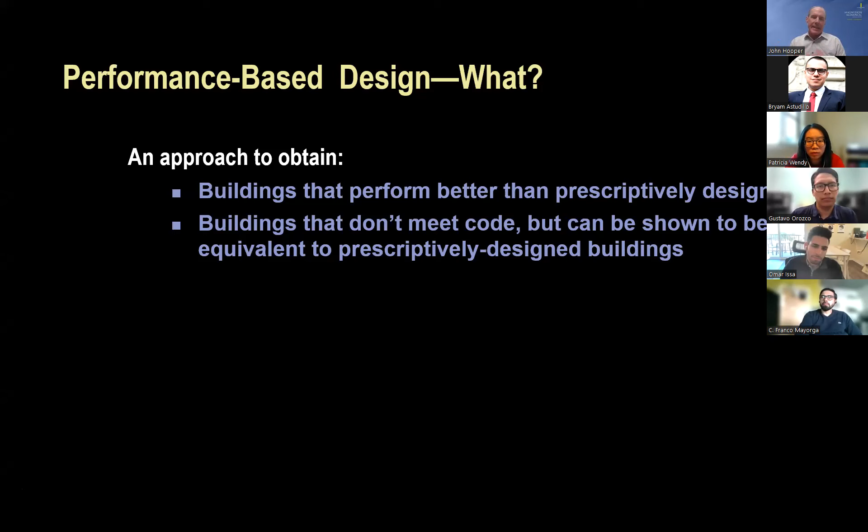So what is performance-based design? It's simply an approach to do one of two things: one being to get a building that performs better than what the building code requires, to improve its performance and make it more resilient. But what we've found in practice is the second case: performance-based design is typically used for buildings that don't meet the code regulations in one way or another. Using performance-based design, you can show equivalent performance to that of a prescriptively designed building, so it meets the code, but you don't follow all the code rules. There have been hundreds and hundreds of these buildings designed in the last 20 years, largely because of that second reason — we want to do something outside the code and prove that it works.

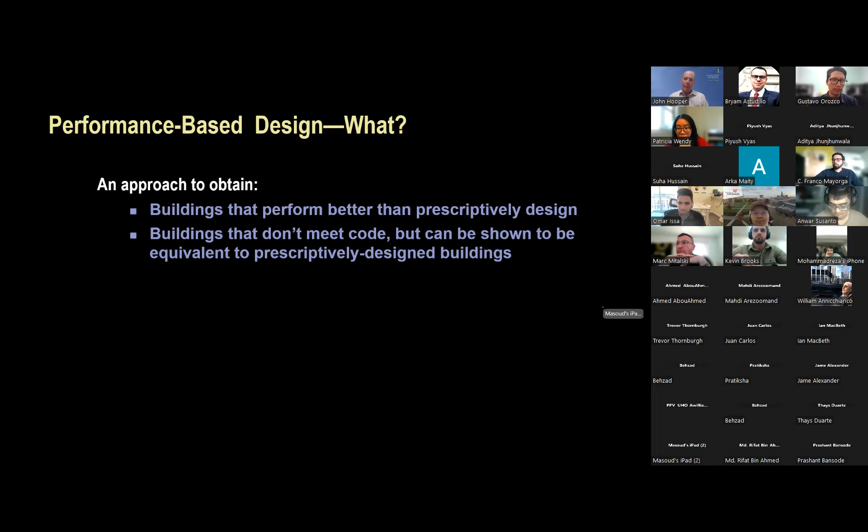Now I'm going to talk generically about performance-based design before I get into both seismic and wind. But without research and the work that you students do, and the students before you, we wouldn't be where we are today.

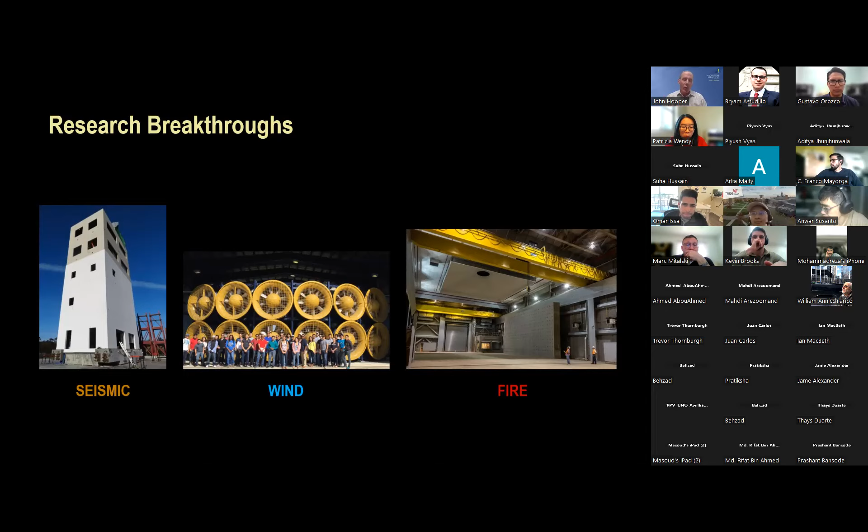And research breakthroughs — here are 3 different research items. The seismic one is the UC San Diego shake table. Without that, we can't really prove how well our designs work unless you can shake a full-size structure on a table. Then there's the wall of wind in the center, which allows us to study wind and its effects in a much more robust way than ever before, down in Florida. And finally, on the right, the NIST fire testing facility, which allows full-scale testing on assemblies of structures, floors, columns, and beams, letting us understand and prove out analytically what we do with real experiments, which is really important.

In addition to the research that happens at universities and NIST that we just saw, there are documents that have been developed with a lot of people involved in these various initiatives to put together best practices, so that we can kind of do it in a similar way. It's not a code, but it's a guideline.

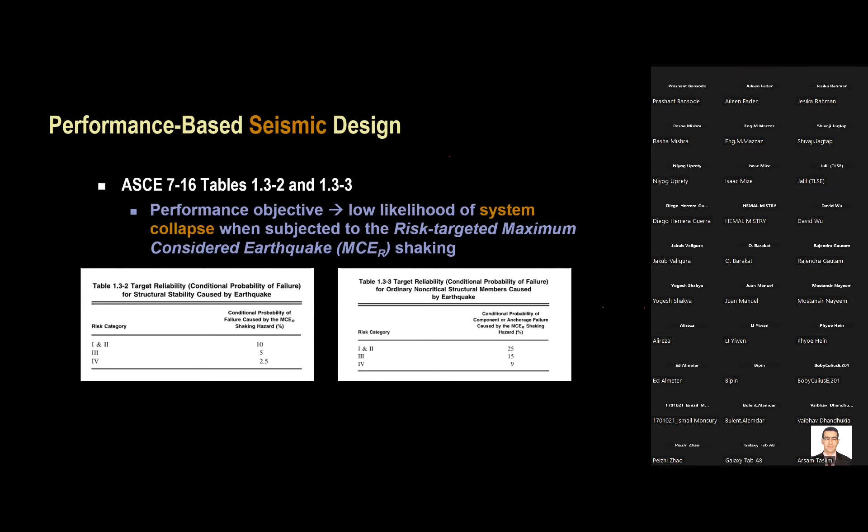What is low? The table on the left shows for risk category 1 and 2 buildings, ordinary buildings, ones we sit in pretty much every day, there's a 10% probability of collapse given MCE-sub-R shaking at the site. That's low. That's what we define as low. And as the buildings become more important, like risk category 4, which represent essential facilities, that number drops to 2.5%.

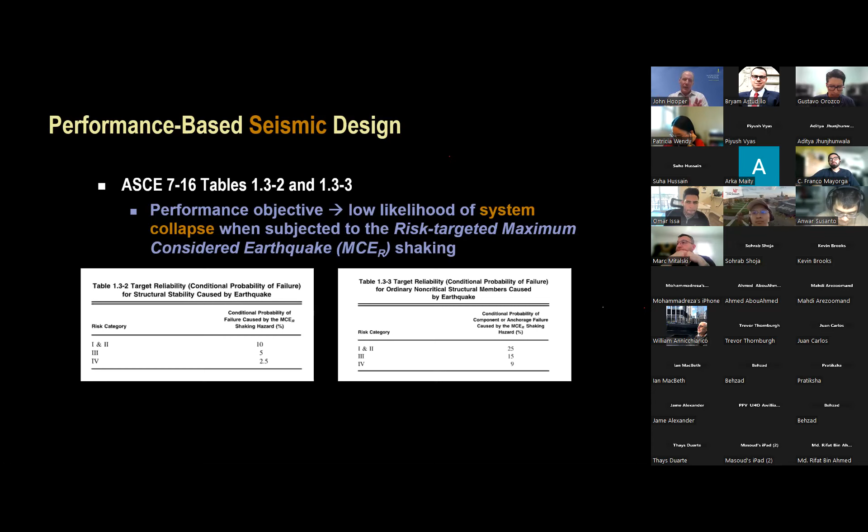And the table on the right is for a conditional probability of anchorage failure that could cause member failure in seismic. We don't really target that directly. We really target the overall system performance for seismic.

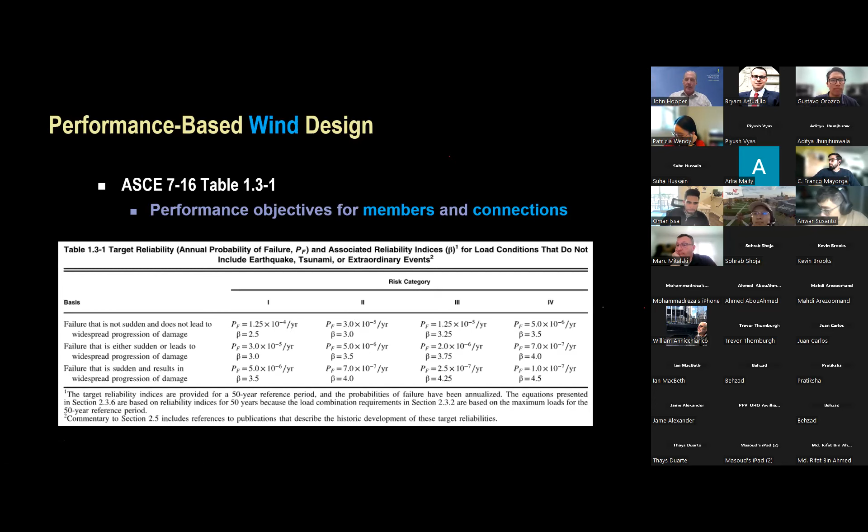But this is for member and connection, so wind does it differently. It's not a system-wide evaluation, it's a member and connection-based evaluation. At least for now, that's going to be changing down the road.

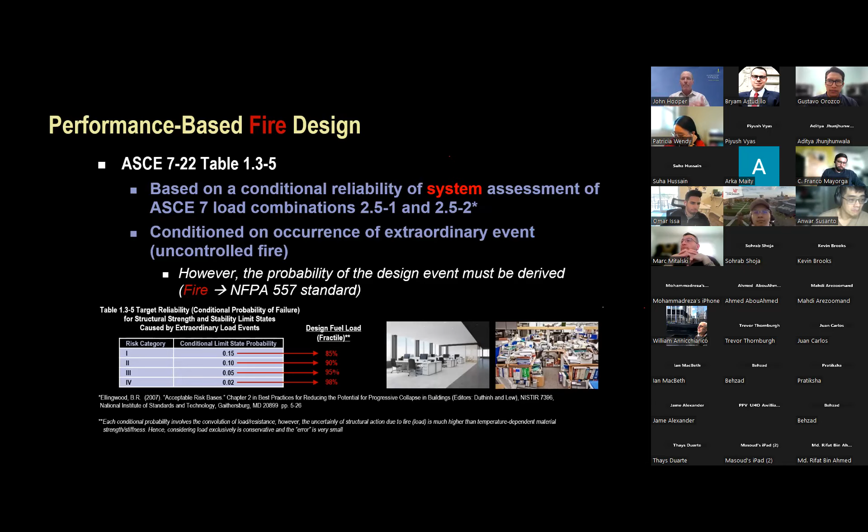In the lower right-hand side of this image is the important difference for fire. It's about the fuel load, how much fuel can burn, how long am I burning? You can see two extreme conditions: one is a bare office, and next to it is my desk. It's not quite that bad, but it could be. And the fire hazard and the fire fuel load is quite different.

And we look at conditional limit state probabilities, shown in the table on the lower left, about what kind of fractile that we're trying to design for and the low limit of probability of failure. So that's kind of an overview, high level, of seismic, wind, and fire.

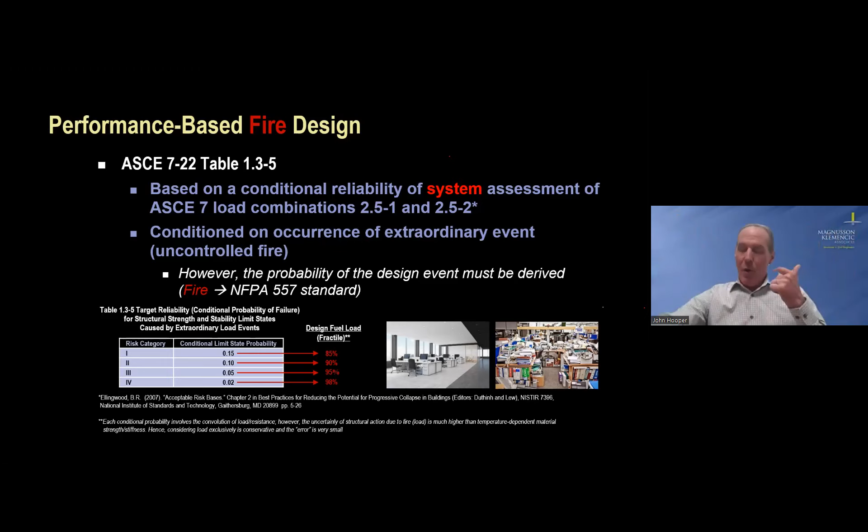Now I'm going to go back and go through in quite some detail on seismic, because that's the area that I work and live in every day. And we'll walk through this with you. The first one I have before me is the PBSD process. This could be for any performance-based process. It's very simple: you select your performance objective.

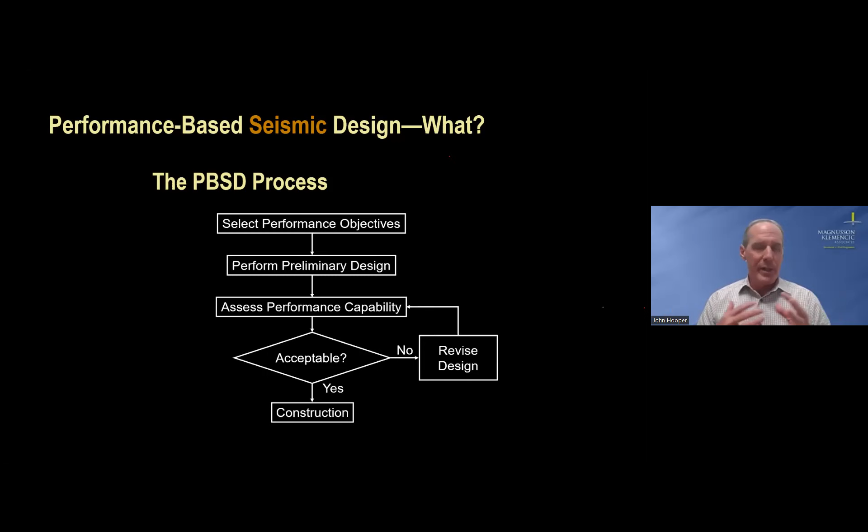What are you trying to achieve? You do a preliminary design to get something set up. You create a model and assess its performance. Do the members meet the performance criteria? Does the overall building meet the performance criteria for global response? If yes, that initial evaluation, then you're done. If not, you revise your design until you deem it acceptable. This is the most simple flow chart you'll ever see, but it's truly the backbone or framework for

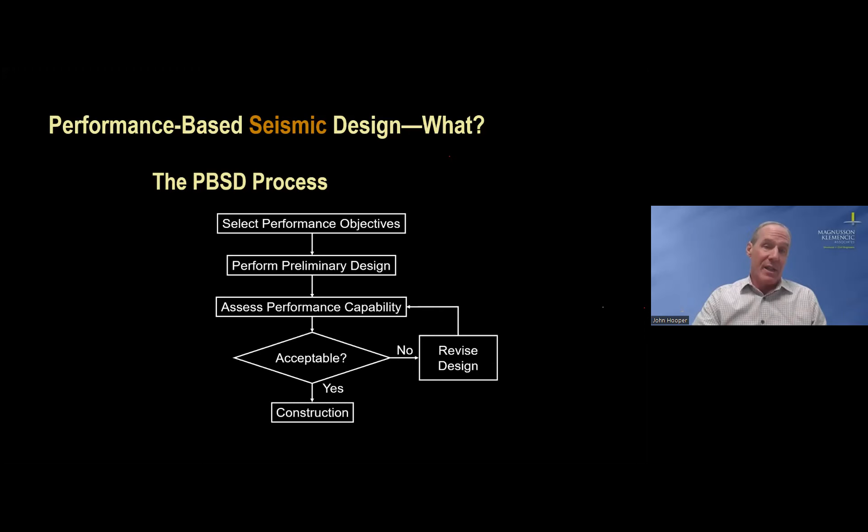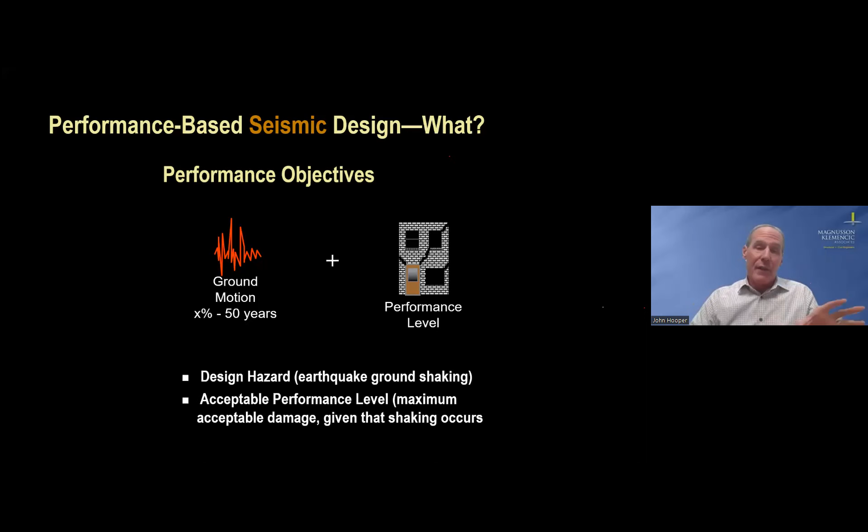what we do in PBD, both seismic, wind, and fire. What are performance objectives? It's very simple: a combination of an earthquake ground motion, usually termed in percentage of exceedance in 50 years. Typically our number is 2% in 50-year ground motions, although there's a lot more detail to that I won't get into. And you assign to that a performance level. Different levels of ground motion have different levels of performance.

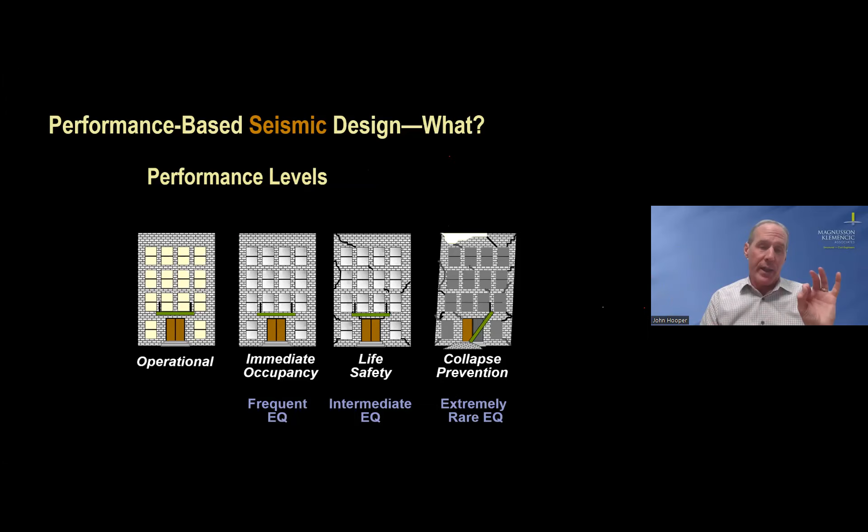But if a frequent earthquake happens, what we want all buildings to perform like is they have immediate occupancy capability, meaning you can stay in the building, you're sweeping up some tiles, you're putting books on the bookshelves, things like that. But you're ready to go in the building shortly thereafter the event. That's a frequent earthquake, maybe a 50-year return period, kind of that range.

The next one, life safety, is called the intermediate earthquake. That's really our design earthquake. You can see by the cracks in the masonry there, we expect structural damage because that is the structural fuse that dissipates the energy from the shaking the building feels. The lights are off because the power may have gone off, etc. The intent here is that everyone gets out fine. There might be minor injuries or so, but the building has a margin against collapse, a pretty healthy margin. The next performance level we describe as collapse prevention.

This is right before the building wants to collapse and pancake or sidesway collapse. This is the kind of performance we try to target not happening, witnessed using a very extreme rare earthquake, the maximum considered earthquake. That's the kind of performance we are trying to guard against, right? Collapse, so that we don't want to kill people. You might get injured, but we want to minimize a whole building coming down.

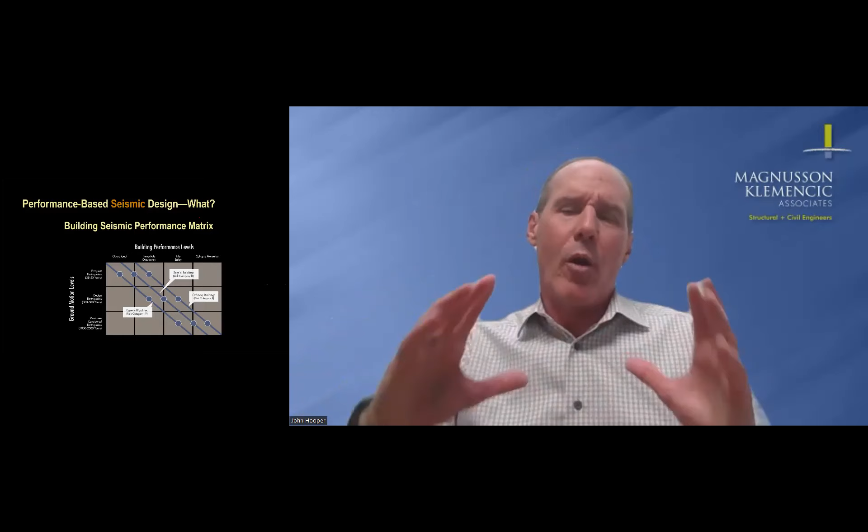Here is the same kind of information shown on a building performance matrix. There are three lines going diagonally across the matrix. The upper right one, for ordinary buildings, is risk category 2. If you concentrate on that line, there are three dots. The most important dot there is what we target: a 10% probability of collapse given MCE shaking. That's what we really are checking. The rest are inferred for risk category 2.

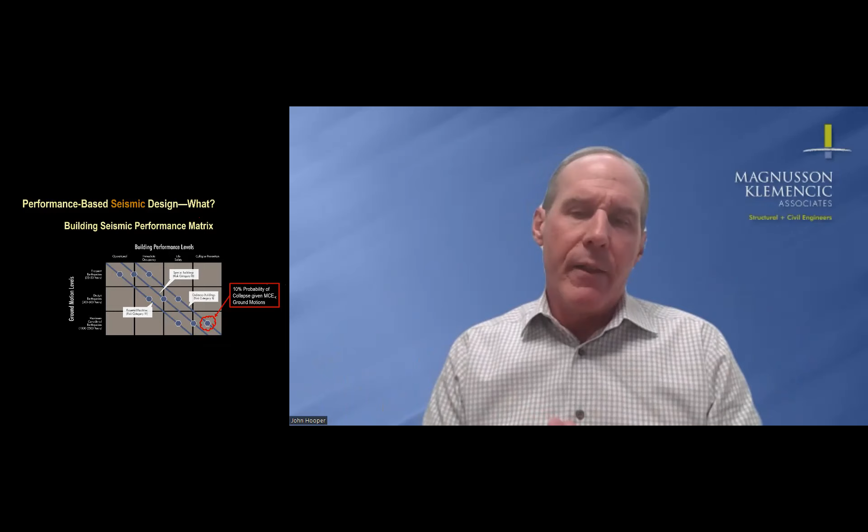For risk category 3 and risk category 4 buildings, these lines start to shift over at the bottom row, the maximum considered earthquake row—the performance level shows improved behavior, improved performance. You see that as this line goes up. So this kind of shows you in one quick matrix what the building code targets when we design for different risk category type structures, given different levels of ground motion you see here on the left of the matrix.

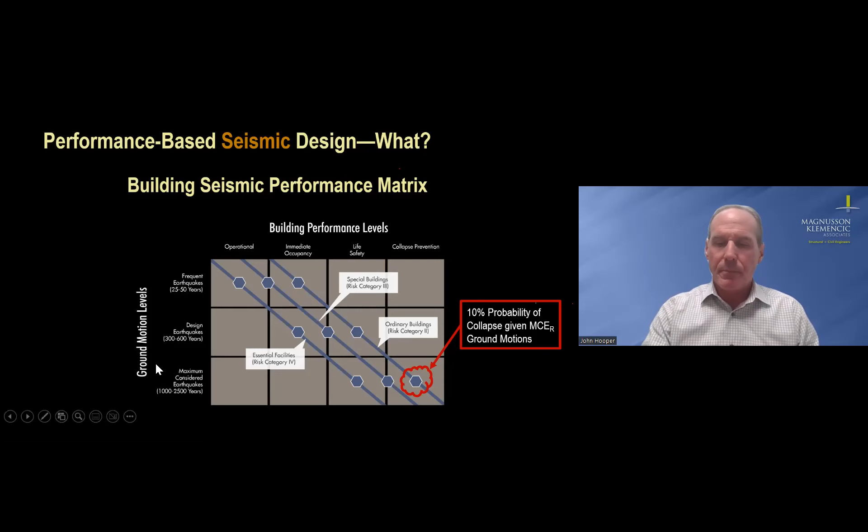We can look at the same information though, assuming a pushover curve. I assume most of us here on the call have thought about and been required to calculate a pushover curve, where you basically say, I have a building, I'm going to keep pushing it laterally, displacing it to the right, and assessing how it's performing as I push it.

Thinking about that as an intensity of earthquake shaking, as I go up this curve, I'm still remaining elastic. Therefore I have operational performance, like we're all sitting in our buildings or office or homes with everything going just fine. We're in the elastic regime, nothing's happening, all is good. You keep pushing, and all of a sudden you get a little bit of damage, a little bit of non-structural damage, etc. You have a tiny bit of non-linear response. There's a slight softening of your structure.

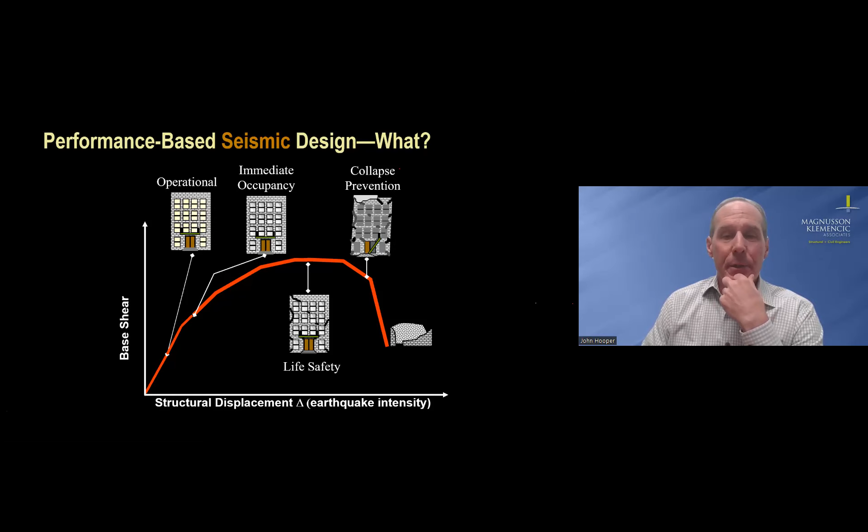And so as the deformation increases and the demand from the earthquake increases, you start to see a little bit of yielding. You keep pushing the curve, push, and get all the way over to a life-safe performance level. Again, this would be at the design earthquake, so you're increasing the deformation and the shear force in the building quite a bit, but you kind of peaked, right?

You have the flat portion of the pushover curve and life safety, that's your design earthquake type of situation. But there's a margin, that's the key here, a margin against the next performance target, which is collapse prevention. So you have a margin so that, again, minimizing the chance that lives will be lost.

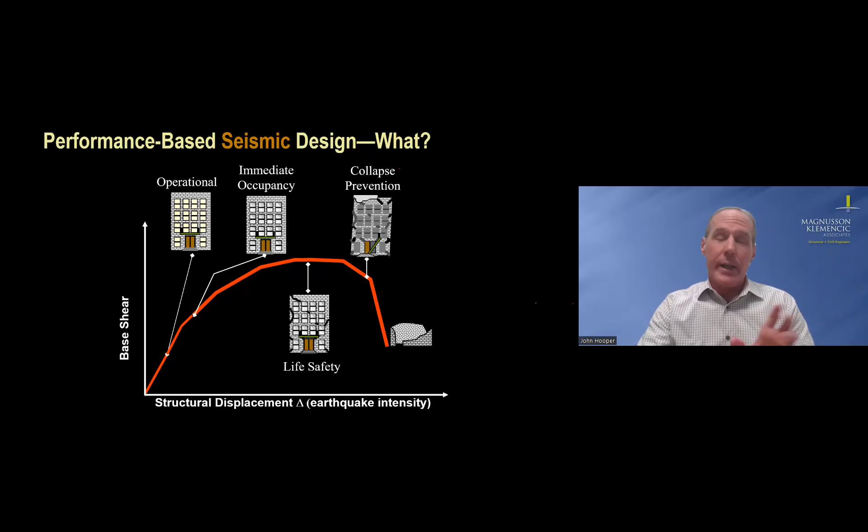And collapse prevention, again, is that MCE shaking. It's right before it loses all strength and comes over. Again, minimizing loss of life and injuries at that event, and that shaking is associated with that maximum considered earthquake kind of movements. So hopefully that performance information is clear enough, but that's important to know. That's what we target in our building codes, and that's what most countries around the world target. We're shifting in that regard, but that's kind of where the world is at today.

So what is it and how do we do it? This is kind of an important discussion here. What we start with is member behavior on the upper left. We need to know how buildings deform, not just in the elastic range—that's easy—it's really in the inelastic region, so we understand how it performs when things start to crack and fracture, et cetera.

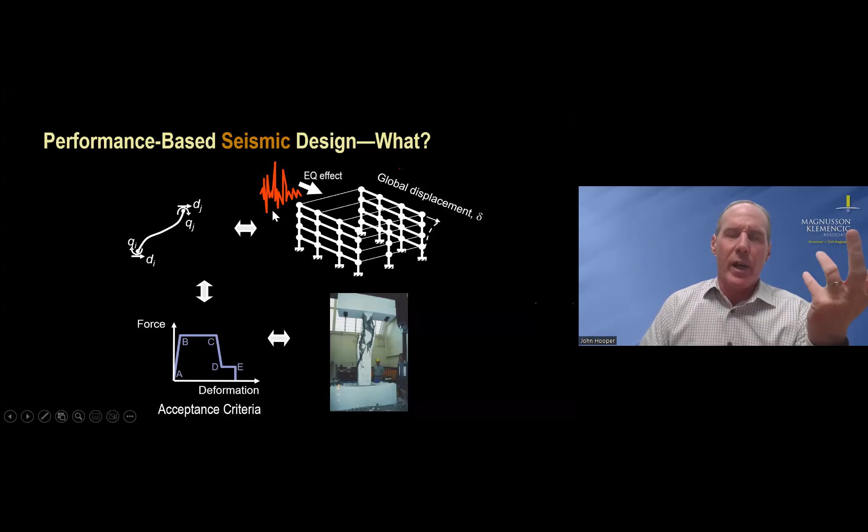That goes into our model. We create a three-dimensional nonlinear model, and we shake it with an earthquake or a series of earthquakes to understand how much damage might happen. Once you understand how much displacement occurs, how much acceleration, et cetera, in the building occurs, then you can ascertain how much damage could be in a column or beam, et cetera.

What we try to do then with this information is target our model to be able to predict what the lab tests are showing us, whether the lab test is of a single column like you see here, or a shake table test like we have at UCSD, so we can corroborate the model with physical testing. Once we have that dialed in and we feel comfortable that we're close, that information flows right into this—what is our acceptance criteria, or the term I like to use, our backbone curve—that describes the performance characteristics of the various elements in the building.

So what we try to do is, this is a loop. Once we have this information, we then change the member information, and we go back and continue to improve our process, mainly based on this testing that we see at the universities, both in the United States and around the world.

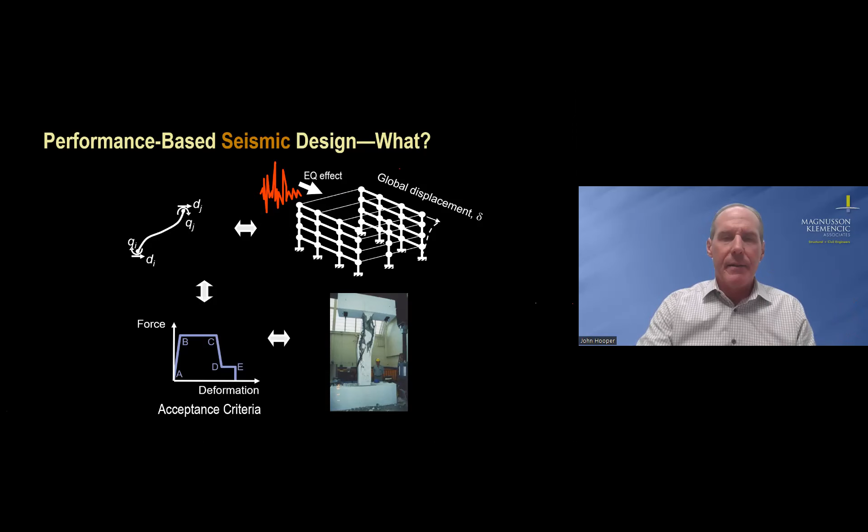Okay, with that, why do we do this? And I mentioned it briefly before, and I'll be very distinct here. In the United States, new systems that are not recognized by ASCE 7—if you don't have a system that's in the standard, you have to do something different. You have to prove that it works.

The second bullet is buildings with structural heights over 240 feet—you exceed the height limit that ASCE 7 has for certain building systems. And lastly, steel buildings greater than about 160 feet have excessive code prescriptive column axial demands that are required by AISC, and those demands are much more than the earthquake will generate. So we can save money and be more efficient in our designs when we look at steel buildings.

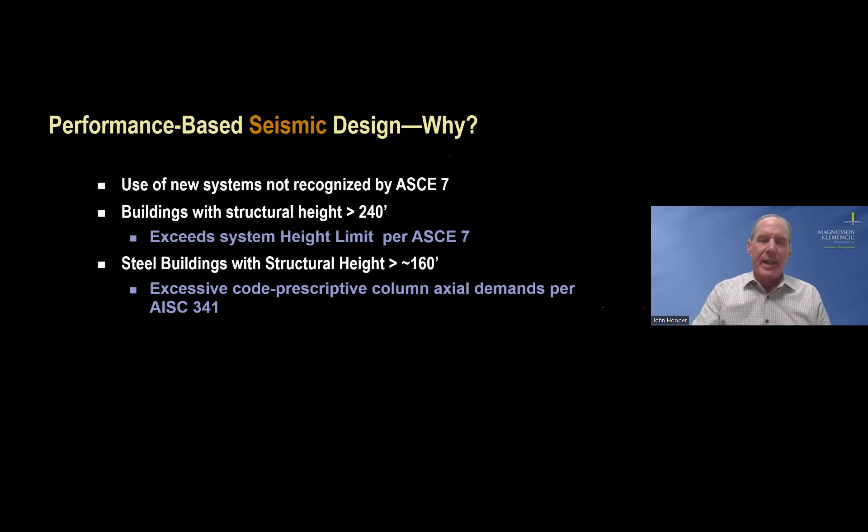Let me give you an example here. Here is a building I sit right next to here up in Seattle, Washington. It's called Rainier Square. It had a new system, composite plate core wall system with coupling beams. It was new at the time, and so we put it together. It is now a new system identified and codified in ASCE 7-22. Its name, branded by AISC, is SpeedCore, because it goes up really fast.

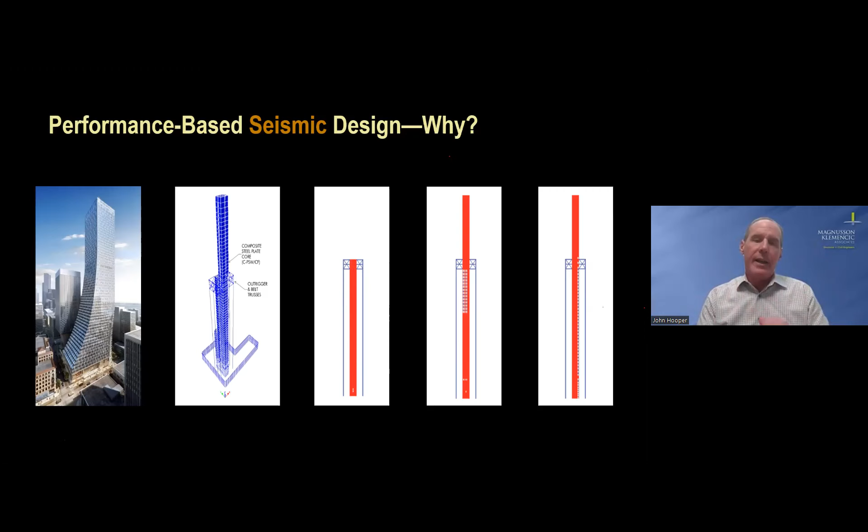And this building had a complexity of not only the composite plate shear wall core, but also had outrigger systems halfway up the building along each of its major lines, and an outrigger and belt trusses to help tie this all together at that level to help stabilize it for overturning. So this is a new system. PBSD is required because it's not in the standard—you have to prove that it's going to perform as intended by the standard.

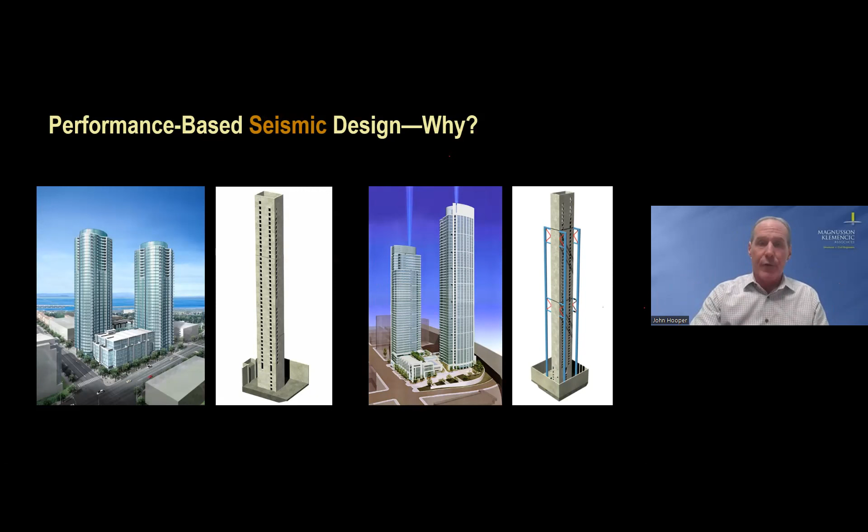We can analyze and make the design work using performance-based design approaches, because the code really doesn't recognize some of these brace layouts. So we did do something else, and this technique allows us to come up with designs that meet the performance objectives we're trying to target.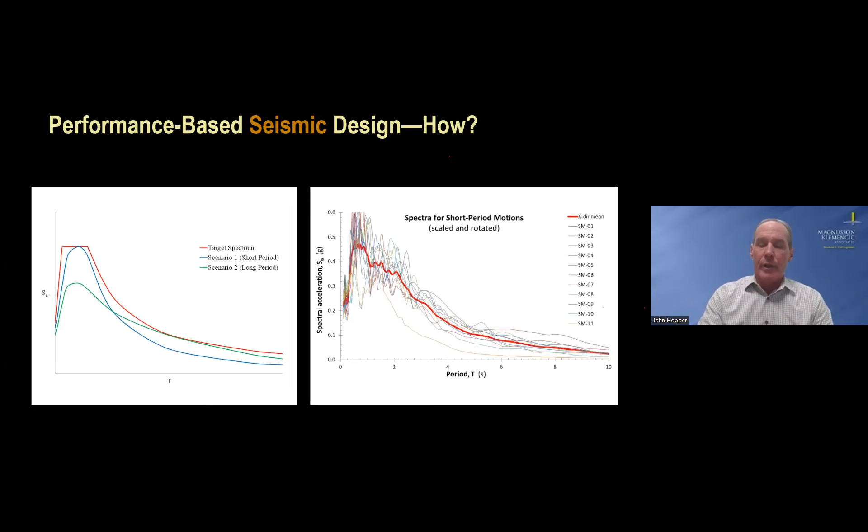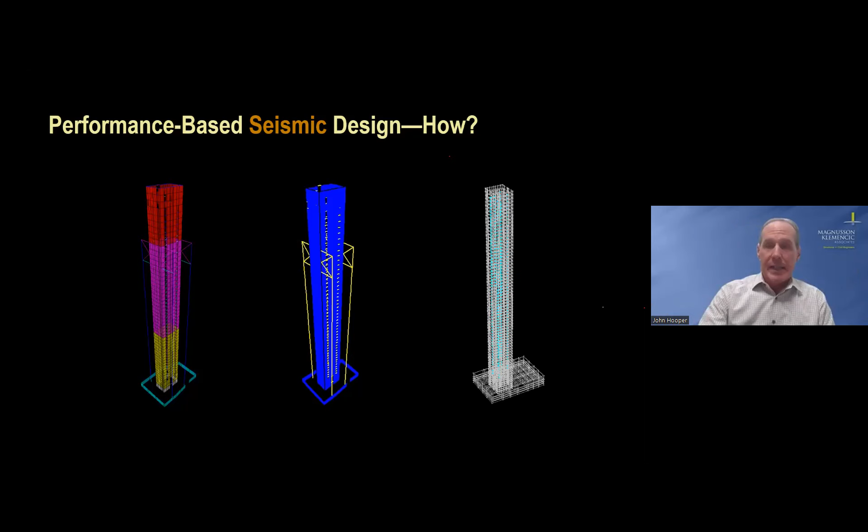And here's the nonlinear models. As simple as that, there are various tools out there. In the United States, most people today use Perform 3D. We at MKA have actually moved away from that. We're using ETABS nonlinear for our work, and there's a detail of why we do that these days. We model all the elements with all their nonlinear behavioral properties, their backbone, acceptance criteria information, etc. We take those ground motions and shake the model, and then we ascertain whether or not the members can withstand the demands that the shaking provides.

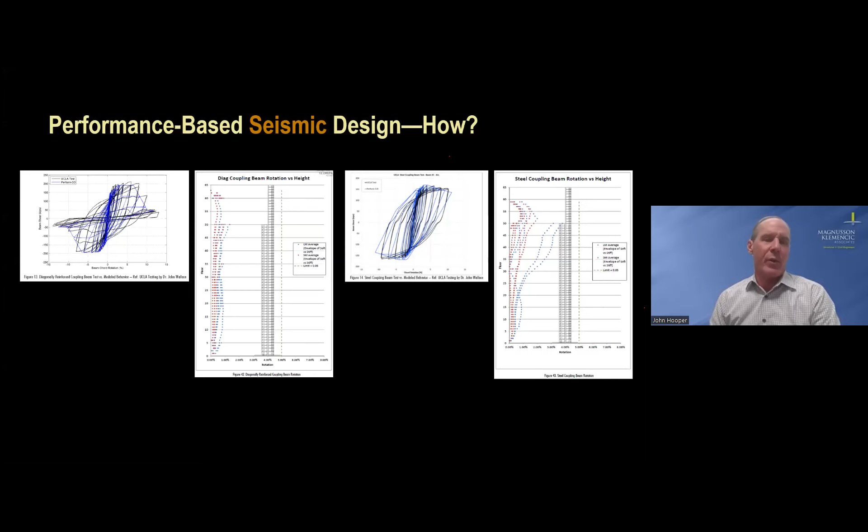The one on the right shows hysteretic behavior for steel coupling beams, again tested at UCLA. So we have different models depending on whether it's a concrete coupling beam or a steel coupling beam encased in concrete. We look very carefully to make sure we can verify our model against physical testing, like I mentioned earlier.

The dots here in the middle are acceptance criteria for diagonal beam rotation—you can see we're well under 1%. If you look at that zone, it's much less than the acceptance criteria here at right around 5% rotation. We're nowhere near it. We're well below it, so that's a good thing.

The one on the far right is the steel coupling beam rotation. There's a little bit more rotation on steel coupling beams because they're stronger and take more demand. So we're getting closer to the acceptance criteria, but we're still well within the acceptance criteria for the coupling beams.

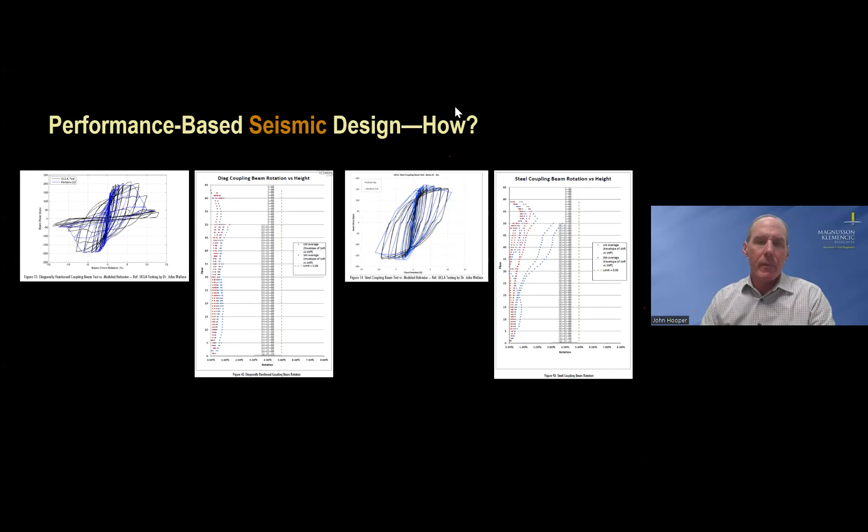I will wait to answer questions, Gustavo, at the end, but yeah, I can answer that there. Okay, I'm getting questions—I just want to make sure I check and see.

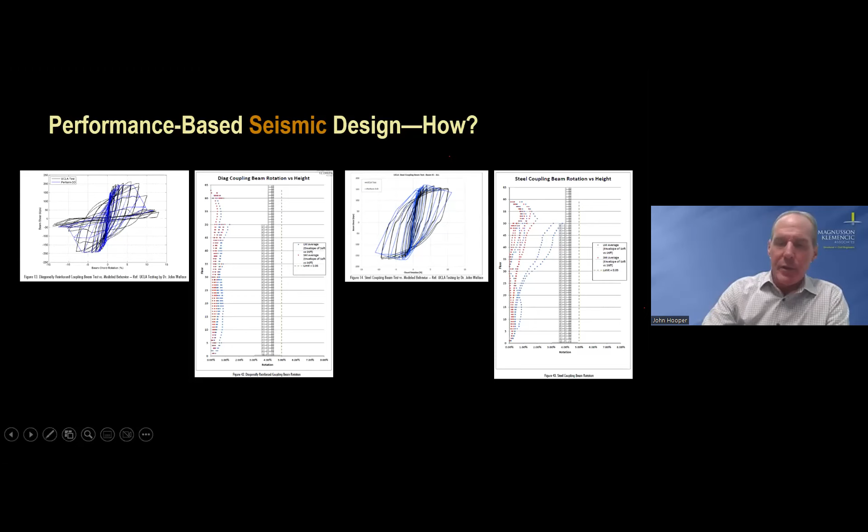Before we're done with all this, and before the jurisdiction says go ahead and build it—your design is adequate, appropriate, etc.—there's always a peer review process made up of experts not within your firm, colleagues doing this work in their own firms around the country. They look at your design from beginning to end and ask a lot of questions, sometimes very hard ones, that help improve the design the engineer of record is producing. Once all that discussion is over, and the design engineer responds to all the comments, the review process is successful when they approve it.

So the peer review process is essential, and jurisdictions require it. ASCE 7 requires it as well—it's a process that must be done. We've been doing this for close to 20 years now, and it's been done by dozens and dozens of firms, both here in the United States and abroad. This is being used extensively in Southeast Asia too, by U.S. firms working there and by local engineers doing their own performance-based designs.

Okay, here's the future—but the future is actually now as well. This has taken some time to develop, which is why I called it the future. We were talking about qualitative performance like life safety, collapse prevention, etc. Can we quantify it with metrics that owners have a better chance of really understanding? Can we talk about what the percentage of replacement cost might be after an earthquake happens? What might be the casualty rate?

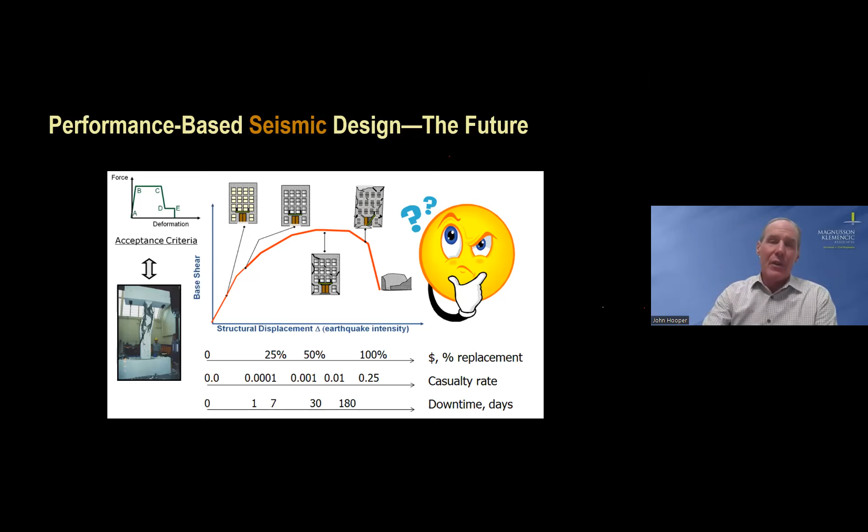This effort started in about 2000. The process of developing this information started in 2001, over 20 years ago, and evolved into what we call the FEMA P-58 methodology. What is that all about? It's a methodology that says, given ground shaking information about what kind of intensity I want to evaluate, I then evaluate the structural response of the building.

How much does it deform and story drift? How much does the floor accelerate? And how much is the floor velocity? Because different things have different sensitivity to damage.

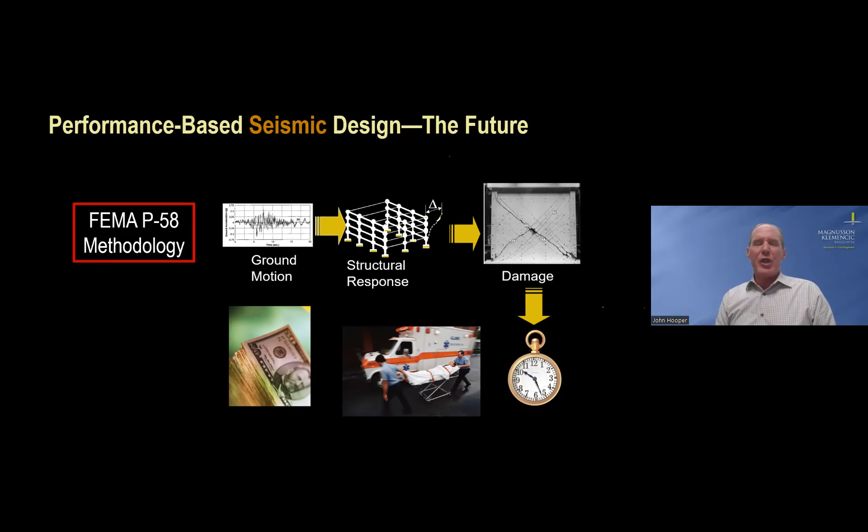Once we understand that, we can determine, by developing what we call fragilities, how much damage might elements within the building feel given the story drift from the shaking, acceleration, or velocity. Once we can pair those two up, aggregate that damage throughout the entire building, then we can estimate the repair cost, the repair time, and the casualties, and also unsafe placards or red tags. So that process of FEMA P-58 marries the damageable elements within a building to the level of shaking that the building feels and estimates and can aggregate these losses we're talking about.

This methodology was first released in 2012, so it's been quite some time. It wasn't used in 2012 very much, I'll tell you that right now. It's only starting to be used now. And it does what I just said.

It quantifies, not qualitatively, it quantifies building performance as probability of casualties, repair costs, repair time, and unsafe placards.

And in 2015, we added environmental impacts, global warming potential metrics, so we understand how much CO2 is being affected by the losses due to earthquake shaking.

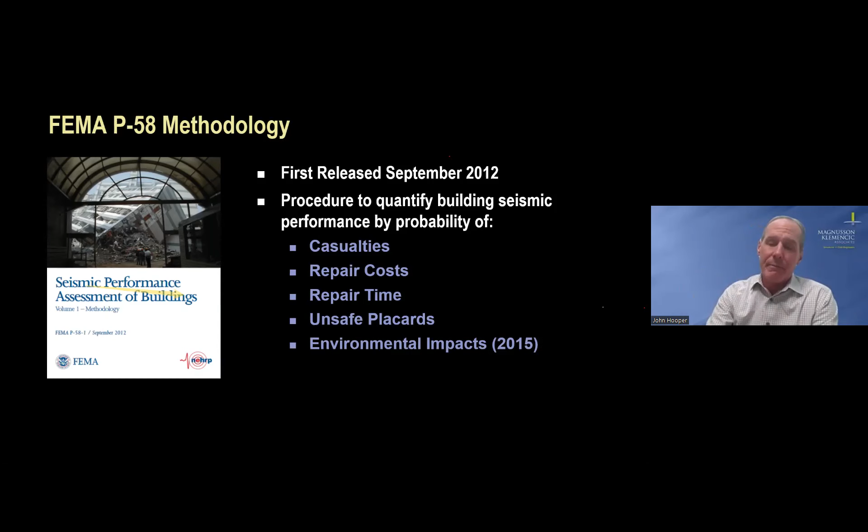How do we do this? It's simply by creating a different type of building model. It's called a building performance model. This is not an analysis model where you shake it - it's not like SAP, ANSYS, LS-DYNA, or OpenSees, whatever you guys use for your analysis.

Each of these components within a building have fragilities that assess how much damage they might incur, given a level of story drift, floor acceleration, or floor velocity. Once we know that information, these fragilities can help us identify how much damage there is. And from that, those fragilities also provide the consequences associated with how much it takes to repair it, how much cost it takes to repair it, etc.

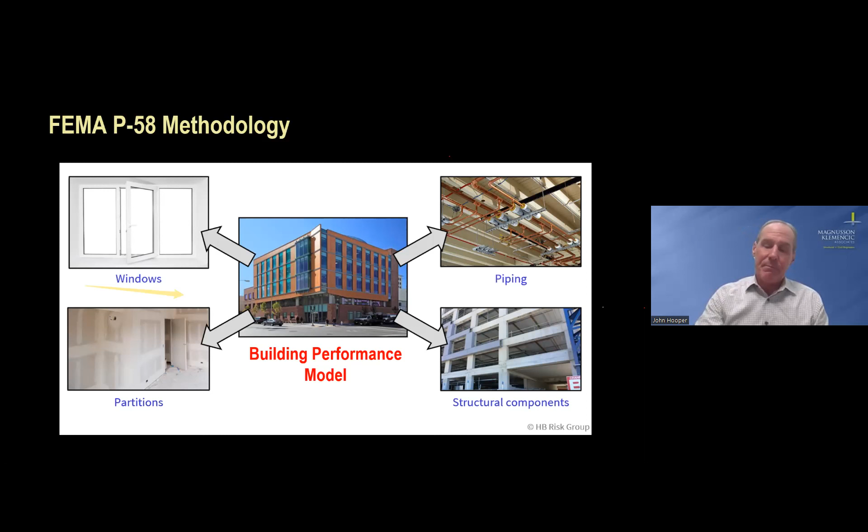So we, in very general terms, provide this information. It makes a big difference what kind of system you're talking about, whether it's a concrete shear wall system, a moment frame system, etc. But this is kind of looking at all of the results and giving a general response or generalized performance expectations for any code conforming building.

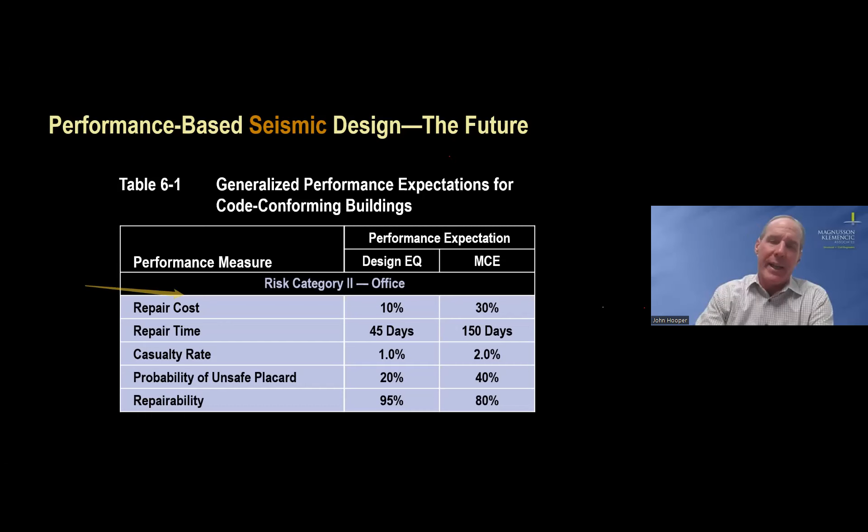So that's what we were targeting. That's what we're getting on average today. Well, that might not be good enough. Those numbers, if you look carefully, are quite substantial, especially with regard to repair time.

There's been an effort underway for several years now looking at what happens if earthquakes happen in a major jurisdiction, major area - just like in Turkey, which happened a couple of months ago. How do you get back to functionality? Assuming you don't have a bunch of collapsed buildings, how do you take these damaged buildings and how long does it take to actually get back into them?

We define 3 functional recovery performance levels. The first one is reoccupancy. That is the ability to get in the building and start to do repairs and take out your belongings, etcetera. You can't stay there, but you can just be in there and start doing repairs. But you can't use it yet.

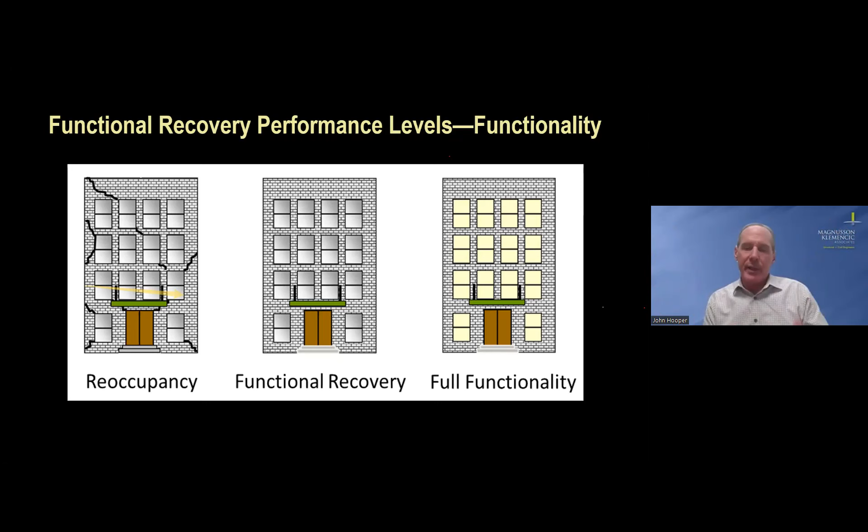So that's the kind of thing we're looking at, figuring this out so that we can provide a different performance level than just how safe is it, and make sure that people come out uninjured, hopefully, but how quickly can we get people back in the buildings to use them again? A different thought process about dealing with that.

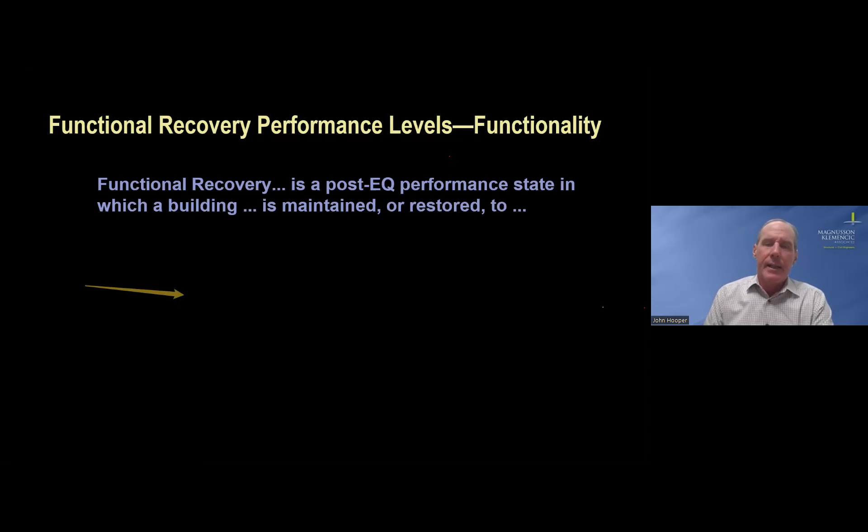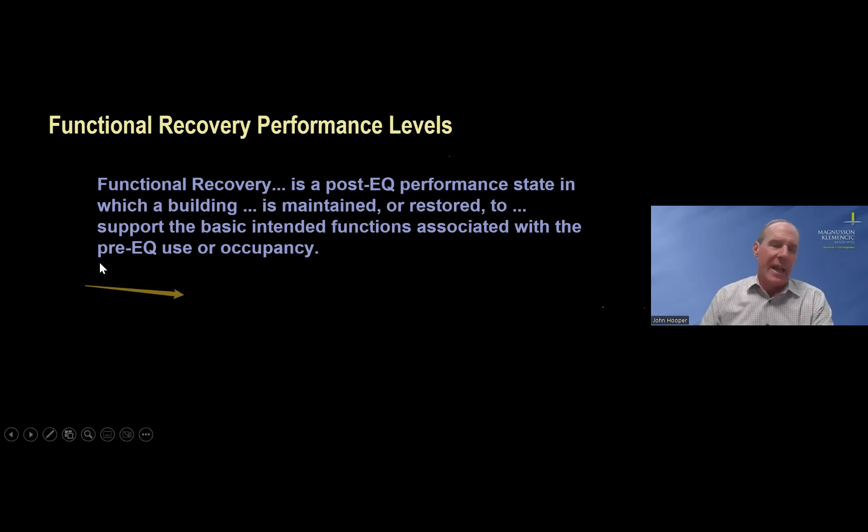What is functional recovery? It's a post-earthquake performance state in which a building is maintained or restored to support the basic intended functions associated with the pre-earthquake use or occupancy. And I just try to say it in words, and here's the actual definition that we use in the process of doing so. And then to what level of reliability, though?

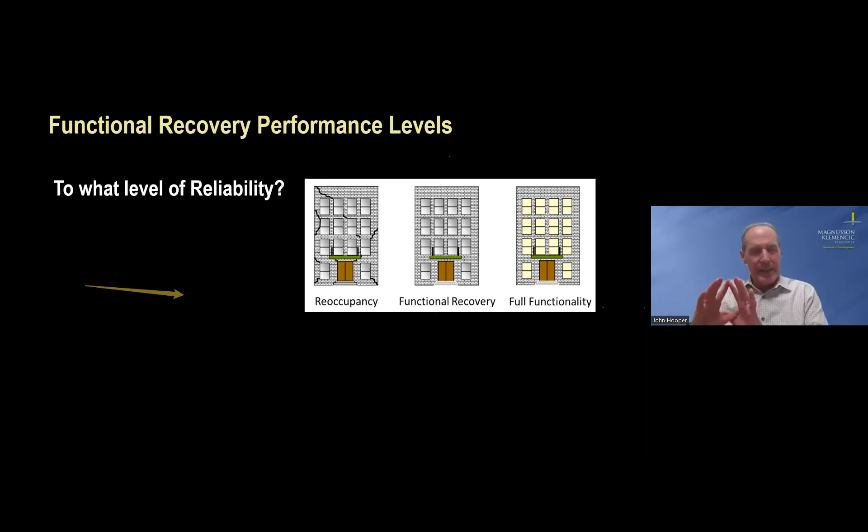So here's some questions that we're asking right now. It was mentioned that I'm working on the Building Seismic Safety Council Provisions Update Committee. I'm the chair of that group, and we're looking at this functional recovery performance direction and looking at it very detailed and trying to answer these questions. And once we answer them, then we can come up with the answers.

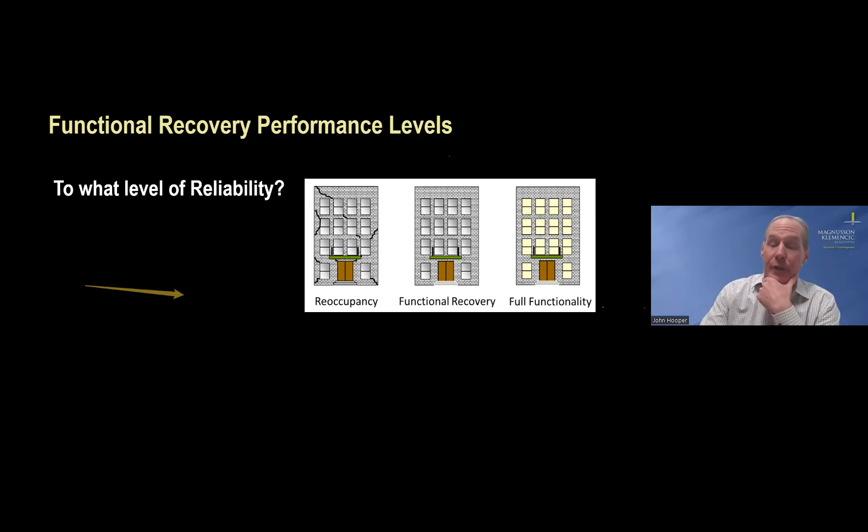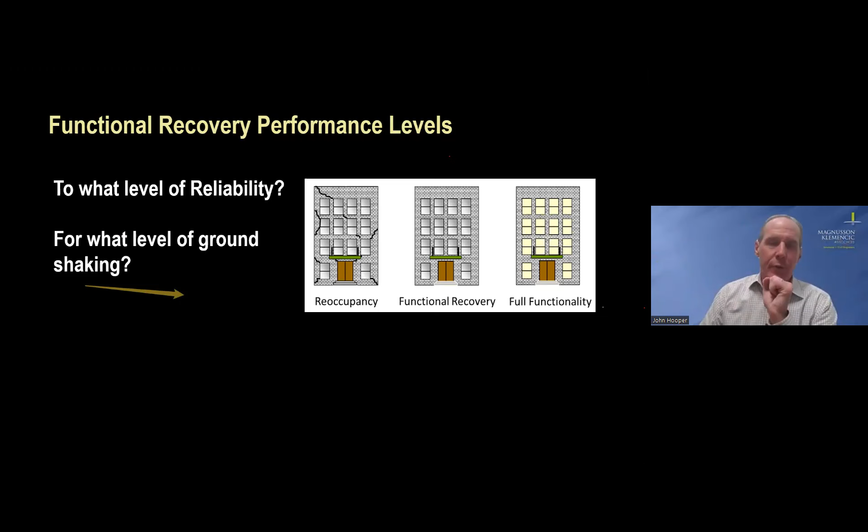So we're trying to ask, to what level of reliability should we target these performance levels for functional recovery? For what level of ground shaking? For the MCE shaking, for the design earthquake shaking, or some other shaking? Again, we're right in the middle of doing that right now as I'm speaking to you today.

And we're doing that right now. We're nearly done. I had a meeting on it this morning. We just got done at noon. We're making great progress. We hope to have it done by the end of this fiscal year for FEMA, which is end of September. And we have a working beta version of it now, but it's always tweaking it here and there. For the intent of helping answer those other questions, we need a technical tool to be the foundation of making those decisions. And this is the methodology for which we're basing our approach on.

Why are we doing this? This methodology is assisting in developing functional recovery framework, establishing the objective, like I just mentioned, establishing the design criteria, which I just mentioned, that we need that background information. And what will this result in the end is potentially model code provisions, although I hope they're only guidelines. At least initially, I don't want to go too far, too fast. Technical standards can be developed around this, and at some point in the future, likely that will happen.

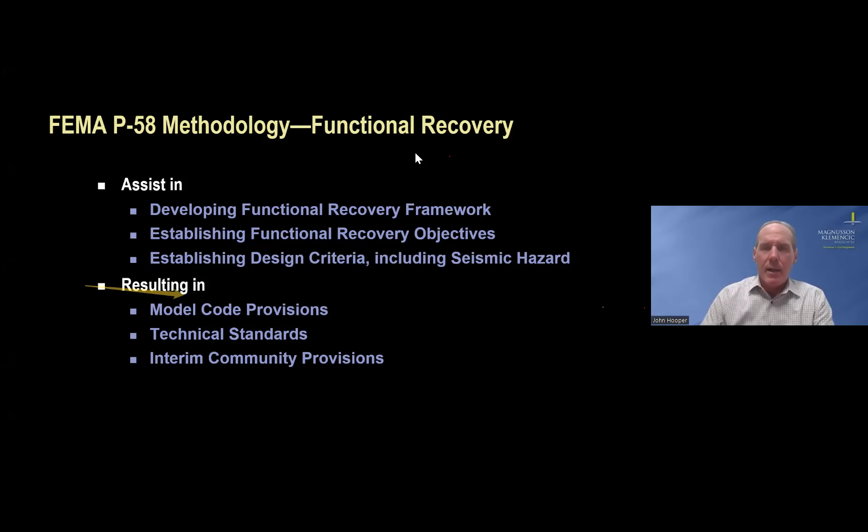Okay, with that, I'm going to shift to the next piece. And that is, if I get there, wind. Just a brief discussion on wind.

Again, this is fairly new, and this is something that here at MK we've been thinking about for quite some time before we started to actually do it for real.

Wind has a spectrum of performance criteria, not too different than seismic, but they are different. At the bottom left here, you see what's called the pedestrian comfort objective, meaning with very normal wind that occurs in a city around your building, you don't want people to be uncomfortable walking in and out of the building. That's important—you don't want difficulty opening the doors in windstorms that occur every once a month up to the 1-year recurrence interval.

The next one, for high-rise buildings, is the human comfort objective, which is really important. That actually drives building design as much as anything else—for tall buildings, we can't have a building that accelerates so much at the top that people are uncomfortable staying in it during a windstorm. If that's the case, they'd have to leave, but if this tall building is their home, their residence, they have nowhere else to go. So you have to be careful to target and get to the occupant comfort objective.

And that's recurrence intervals between 1 and 10-year wind return period pressures that come around. I'll jump up to the second from the top—that's the strength wind objective. That is what the code does. When you do a wind design per ASCE 7, that's the strength design. You've got to make sure you meet all the criteria in chapters 26 through 31 of ASCE 7 to ensure you have enough strength to make that happen.

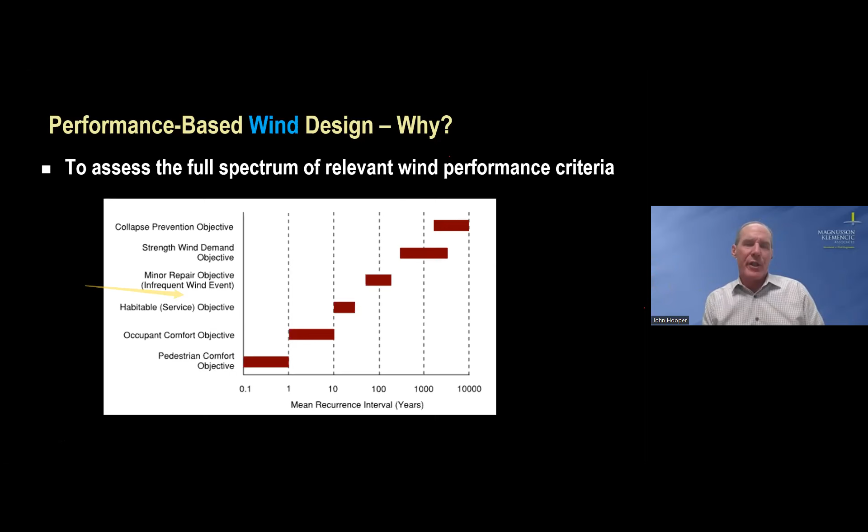What we're trying to assess next, at the very top, is what about collapse? We don't want that to ever happen in a windstorm, of course, but with the right tool we can see what recurrence interval wind speed will cause that to happen. We want to understand the full spectrum of performance so we can dial in better guidelines associated with performance-based wind design. Why are we doing it?

This is an example of what we found, actually in Southeast Asia, where we were designing a seismic force-resisting system that was dominated by wind demands—meaning the winds were so large that the elements we wanted to provide ductility for in seismic had to be stronger than we'd want, because wind requires them to remain elastic. So these ductile seismic elements had to be strengthened for elastic wind loads. And their ability to initiate yield is reduced, sometimes significantly, which drives demand on the elastic responding elements because the ductile element—the fuse of the building—is too strong.

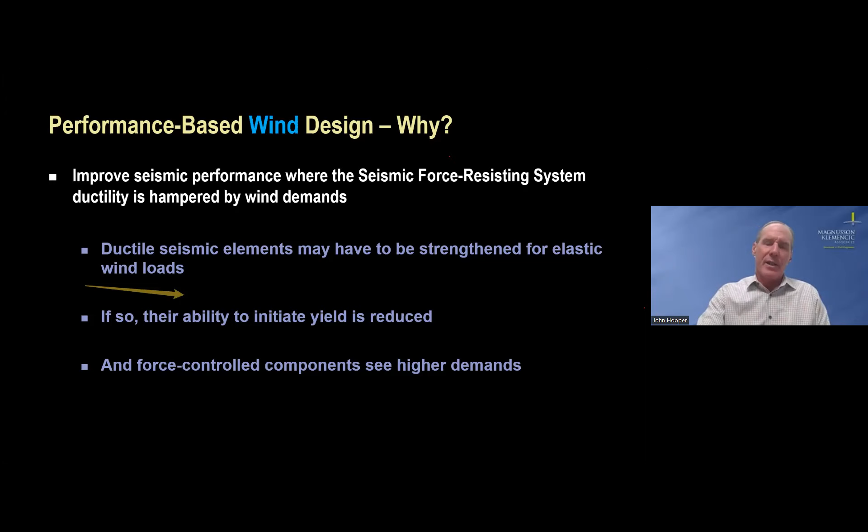So if we could get some relief and a little bit of nonlinear behavior due to wind demands, while still performing well and meeting the target reliability in chapter 1 of ASCE 7, then we can have reduced member sizes for seismic and a better-balanced system—a building that performs well in both wind and seismic without being overly conservative and spending extra material that you really shouldn't need. So we have this issue of wind-induced demands governing seismic design members.

So a group of engineers and others got together and, as I mentioned earlier, created this performance-based wind design guideline. The second version just came out—it's coming out right now as we speak, volume 2. We've updated some things within it. It includes this table, table 4.1, performance objectives and acceptance criteria, covering all the different things we think about and care about.

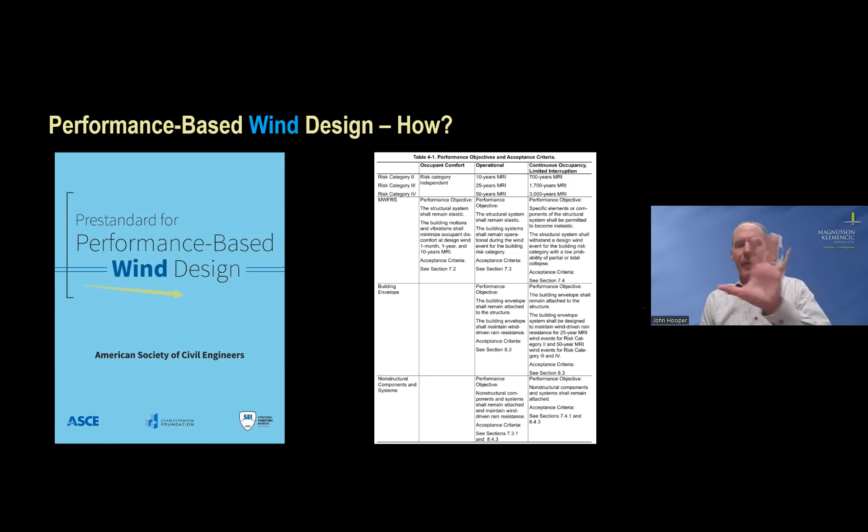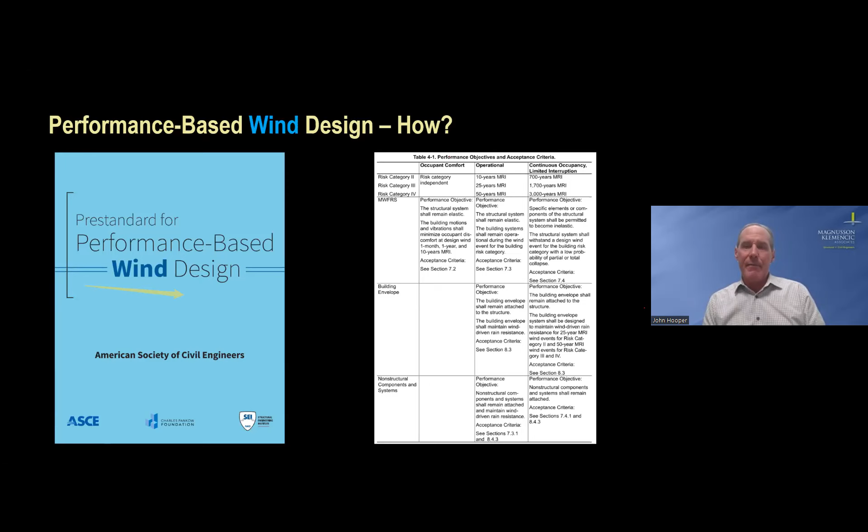At the very top: occupant comfort, operational criteria, and continuous occupancy performance lexicon and language. It's different than in seismic—it should be, since it addresses different things between the seismic system, the wind system, the envelope, and components within the building. A lot of thought and effort went into creating acceptance tables like this, which provide the basis of our approach for wind PBD.

It takes a long time, but we're heading in that direction, and sometime down the road it's getting very close to being fully functional to do this fully coupled reliability analysis. Method 2 comes from the seismic world.

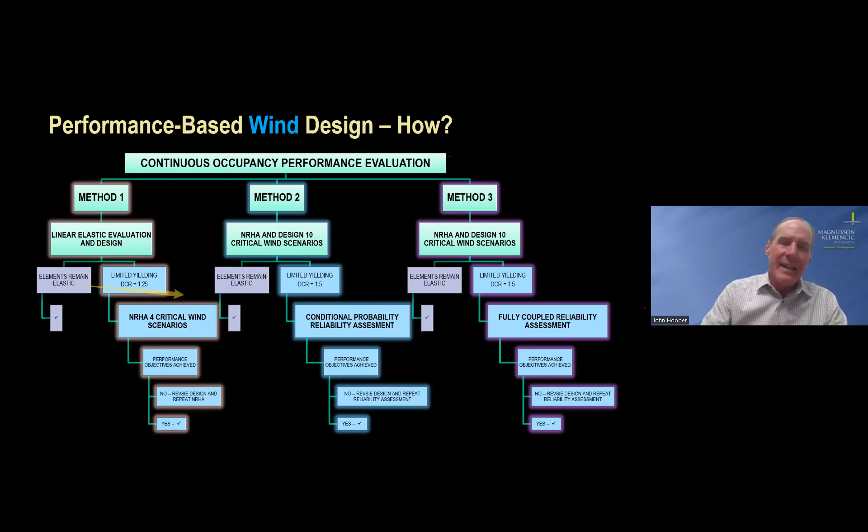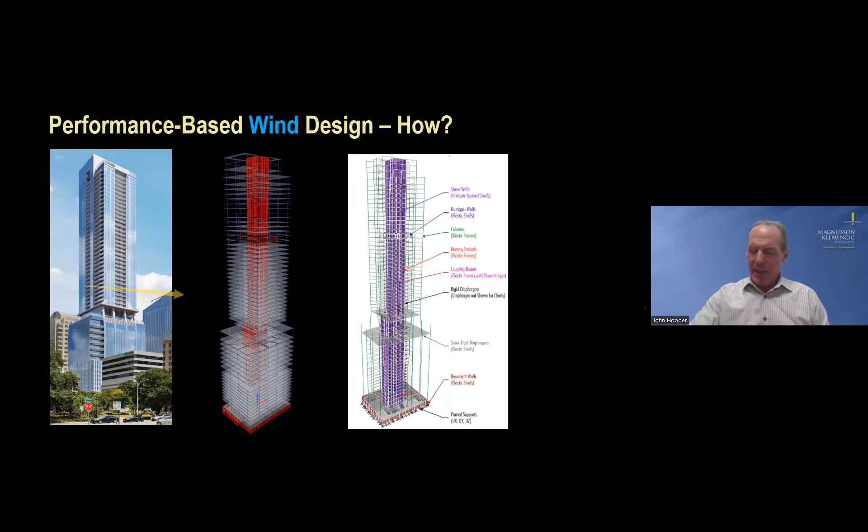Here's a building in Austin, Texas, for which this building got a permit. It's under construction right now. We're showing you the nonlinear model that was created for the building rendering you see on the left. It's a series of concrete shear walls as the major system. It has some outrigger walls for helping stabilize overturning. The coupling beams are the elements that, if there is inelastic action, it's going to be in the coupling beams, limited of course to what it can do.

From the wind tunnel, if this were a traditional design, you would just do your typical strength design and be done. What we do here instead is design for linear response history analysis, not just a static wind load. We do linear response history analysis and look at the criterion for the different components to make sure we don't exceed the acceptance criteria. Once we get through and pass those values and acceptance criteria, we build an enhanced nonlinear response history analysis.

We conduct the analysis using the wind time histories from the wind tunnel. These wind tunnel time histories represent an hour-long windstorm. Those hour-long windstorms take us two weeks to analyze per windstorm because there's a lot of data—it takes a lot of time to do the analyses. Then once you assess the peak demands and compare them against the acceptance criteria, if you're successful, you're done, just like the initial flow chart showed at the very beginning. If not, you have to make changes to your design and do it again until you pass all the acceptance criteria for the nonlinear response history analysis for wind.